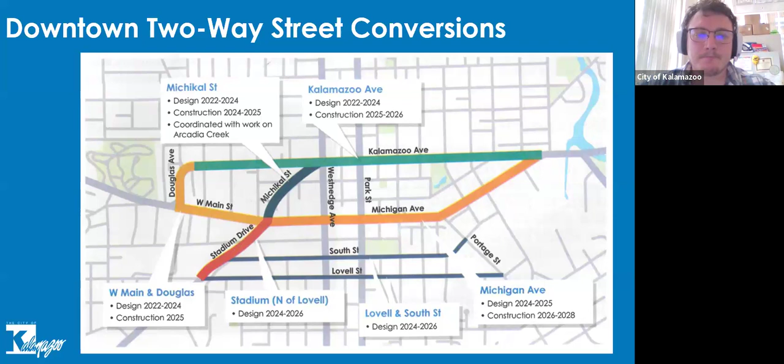Moving on to some more downtown work. There's a lot of work right now related to downtown utility upgrades, specifically tied to the future event center in downtown. All of these projects are being phased out to minimize impacts to navigating through downtown, although it's definitely tough right now because of big projects like Ransom Street and Michikal Street, to name a few.

Some of these projects are being managed by utility companies like Consumers Energy. The Michikal Street and Ransom Street projects are city projects. This gives you a ton of information on the type of work that's happening, and it's also available on the city's website. It has its own project page where you can download these maps if you'd like copies.

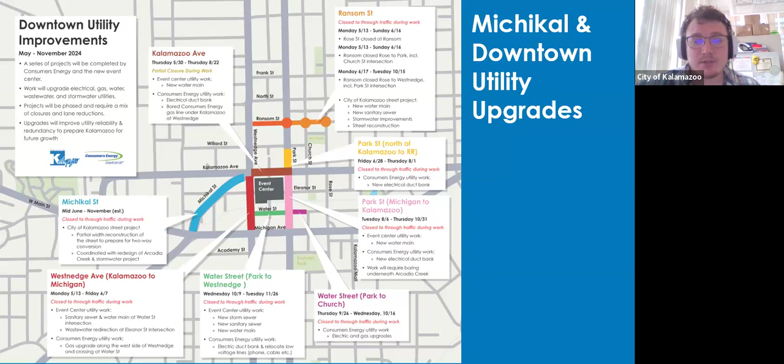All that work is leading to some detouring, right? So we have some pedestrian detouring, some motorist detouring, at least through the next couple days, maybe a little bit more. Specifically, that section of Westnedge Ave that needed to be closed for upgrades. So all that to say, businesses are still open. Follow detouring signs and watch for any signage changes. And of course, you can subscribe to those email lists for these projects to get updates on that information too.

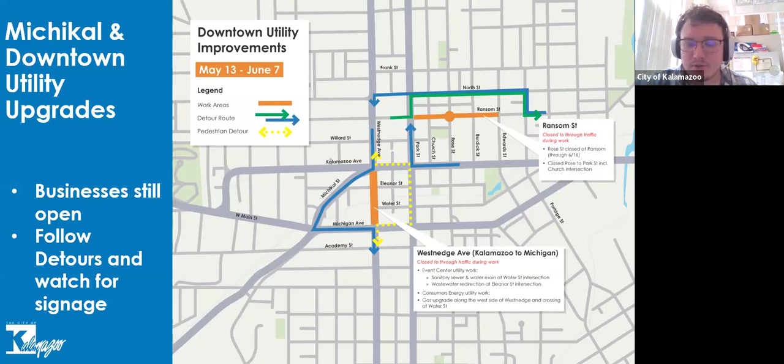One quick thing I wanted to touch on as it relates to the Michikal work is that during this period the street itself is going to be closed, and the Elm crossover is going to be closed and will remain closed even after Michikal Street opens back up. Elm crossover was placed within the network a long time ago when the one-way system was put in. It's not going to serve a major function with the new design of Michikal Street, and Michikal Street's being converted to two-way as well.

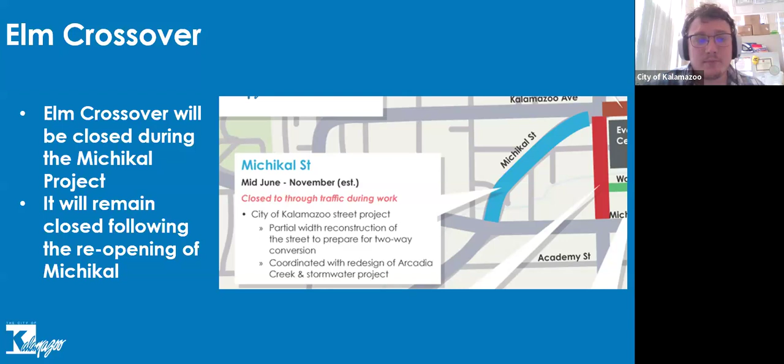A lot of this was also born out of when we did engagement around Kalamazoo Ave. We were in the Stuart neighborhood talking to residents, and there were a lot of folks interested in Elm crossover going away. So this is kind of a confluence of factors, but I wanted to call that out specifically.

With all this work going on the next couple of years, the other thing to draw attention to is that the Kalamazoo River Valley Trail is officially detoured for the next few years, because of all the impacts around Michikal Street, Westnedge Ave, Kalamazoo Park—not only the utility work, but also our major street projects. As of right now, this is the official detour map.

Pitcher Street and Michigan Ave are protected for folks on bikes, and then Elm Street is being used as a detour route on a low traffic volume street to continue on the trail. This could be updated based on how projects move forward, so just stay informed on this as well. We've been working a lot with the director of Kalamazoo County Parks to make sure signage is updated, so people can find their way around using the detour.

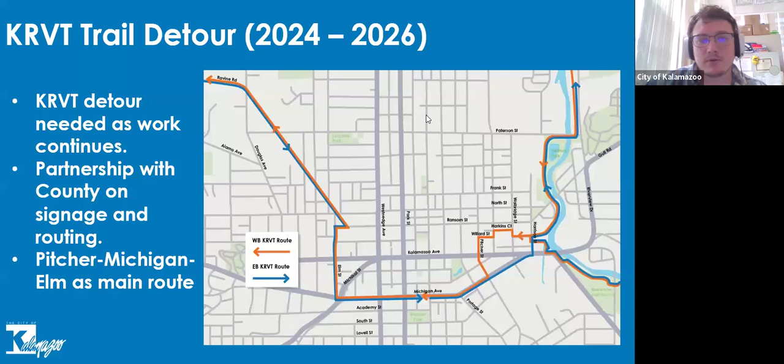No major updates at this point for Ransom Street as far as I'm aware—Tom or George, you're welcome to add any information here. This information is up on the city's website right now, showing where the detouring and local business access is in relation to the Ransom Street project. They've been moving westward since the project started up in early spring, getting through some big intersections—Burdick, Rose Street, and eventually up to Westnedge. Just a reminder, be aware that this work is still continuing, but there's business signage and wayfinding signage installed so you can find your way to local businesses on the north side.

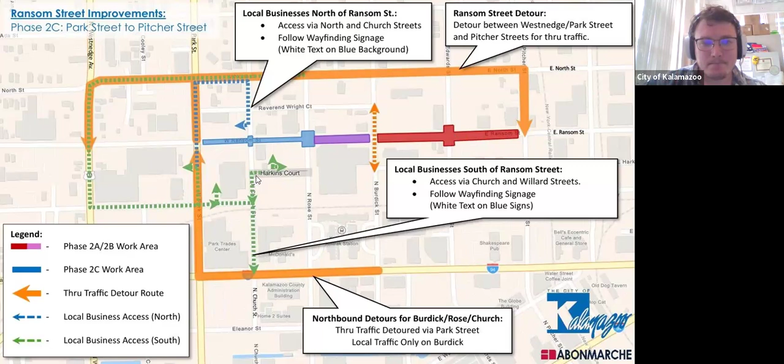And I'm going to pass the baton to George Waring to talk a little bit about Westnedge Ave.

Thanks, Dolan. So Westnedge Avenue work continues to keep going on. The most recent update is that the Crosstown and Westnedge intersection was closed today. Traffic should be aware that the main detour route for Westnedge traffic is now Lovell to Oakland to continue proceeding south. As you approach the Lovell intersection, take a right on Lovell and head over to Oakland to keep proceeding south, unless you have a local business in the area north of Crosstown—then follow the signage for local traffic. You can still access that area.

Work continues on the water main. They've just started doing some curb and gutter and storm work as they've been finishing up the utility work. As all the utilities are placed onto the project, they're going back behind and doing the restoration in the curb and gutter. With that, paving operations are still planned to take place at the end, once all the utility work's been completed.

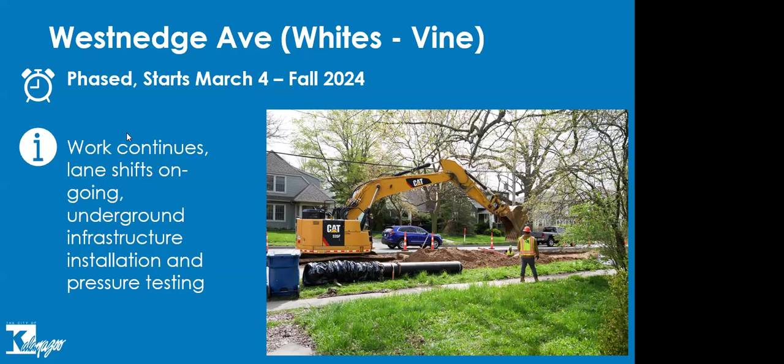White's Road is in much the same spot as Westnedge. They're continuing to lay water main, then they'll pressure test and fill that, and make side street connections to connect all the residents back to the new water main as they proceed along. So that work's still progressing.

This project also has some new signal pole work going on, putting in new foundations for several intersections and getting that prepped. There was a concern about the right turn only island at White's and Oakland and its placement. Our staff looked into that, and the placement was correct. However, the vehicle lanes, the layout of the lanes, and the pavement markings need adjustment. That's something we're working with the contractors on to implement as the project goes forward.

Inkster Street Bridge reconstruction has been going really smoothly. They're ahead of schedule. Work on the deck is completed, they finished pouring it, the pour went as planned and it's finishing up its proper cure time. They'll be working on the approaches to the bridge next. Right now they're looking to have most of the work done by the 4th of July holiday, which is tentatively when we're looking at opening Bronson Boulevard to traffic again, while they do some finishing touch work on the remaining bit. It's gone very well, the contractors performed well out there, so it's going to be a really neat asset for the city.

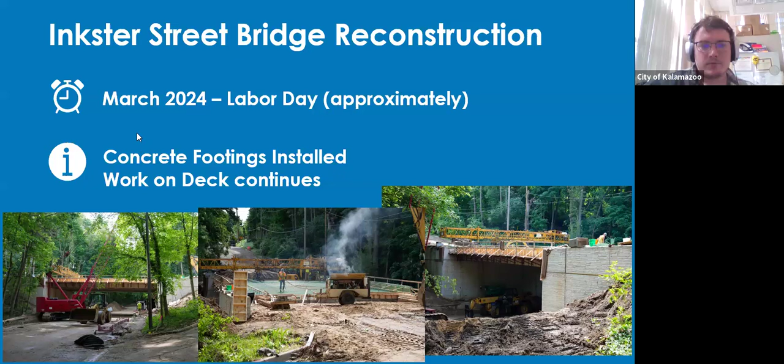Tom, you want to talk a little bit about an upcoming project?

Howard Street. We anticipate it's going to be starting shortly after the 4th of July, and that'll go for about a month, finishing up a good amount of time before returning students and new students come to Western for the fall semester. That's important given the proximity of Western. This is the section of Howard that runs underneath the bridge to the hockey stadium and underneath that pedestrian bridge also.

For the most part it's a pretty basic resurfacing project, but we've got a few extra items, and we're going to be adding a turnaround. That's going to be the most noticeable difference, so that vehicles trying to get over to the Knollwood neighborhood don't have to go up on West Michigan, but instead can get over to Rogowski and into that neighborhood by Redwood Ave a little more easily. That'll probably be the most noticeable difference coming with this project.

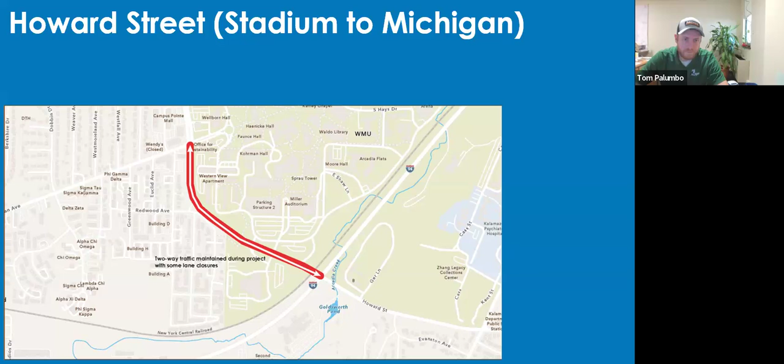Awesome. George, did you want to talk about Riverview Drive, the work that just was completed?

Riverview Drive, they completed the final paving of the surface and the majority of items on that project. There are still a few items left to complete, a little more restoration and cleanup that needs to be done over the next couple weeks. But that project went relatively smoothly and got done within the project window. There's been a lot of improvements: all of the sidewalk in bad shape got redone, we redid any ADA crossings that didn't meet standard, remarked with high emphasis signs and pavement markings the crossing at Hotop, and made safety improvements at the East Michigan and Riverview intersection.

Due to some high crash history, due to a dual left turn and a higher speed pork chop island cut through there as well, we made some of those changes recently. We're still monitoring the crash impacts and the traffic impacts on that, as well as speeds. We'll be watching that over the next several years to see how that corridor responds to some of the changes made.

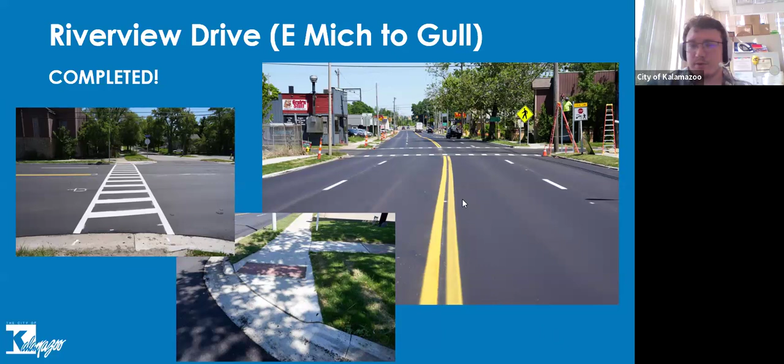Awesome. So those are some of those big local projects. I wanted to turn some attention to some federally funded efforts that are going to have some big impacts alongside some of those local projects. Tom, I was hoping you could touch base a little bit on the Protect grant.

You might have heard that the city was awarded $38 million in federal grants for, I want to say, a $45 million project. So we've got some money coming from other sources as well to fund this.

What this Protect grant project is going to do is eliminate floodplain around Arcadia Creek. And when I say eliminate floodplain, that doesn't mean we're filling it in or raising up the ground. That's not a sustainable way to do that, but rather we're going to increase the capacity of the creek. Part of this creek is going to be relocated.

Much of it is in that orange area that you see there. A significant percentage of that is running underground in pipes. Those pipes are undersized, and just having a creek run underground isn't really a good way to have a creek running through our city or anywhere.

So we're going to do what we call daylighting, which is exactly what it sounds like - bringing that creek above ground in as many places as we can. Obviously it's still going to need to go under roads, and there are some tight spaces where it's going to be hard to daylight, and it might not be feasible. But anywhere that we can, we're going to daylight it, and improve the creek to resemble a natural creek, bring it back to what nature intended.

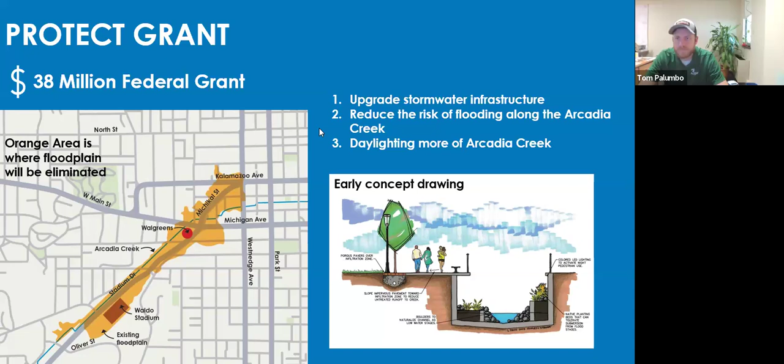Thanks, Tom. I'll just shout out that this was one of the, I think it was the largest federal grant distribution for a project for this work. So this is pretty big deal for the city, especially with all of the localized flooding issues that we've had in the pretty recent past.

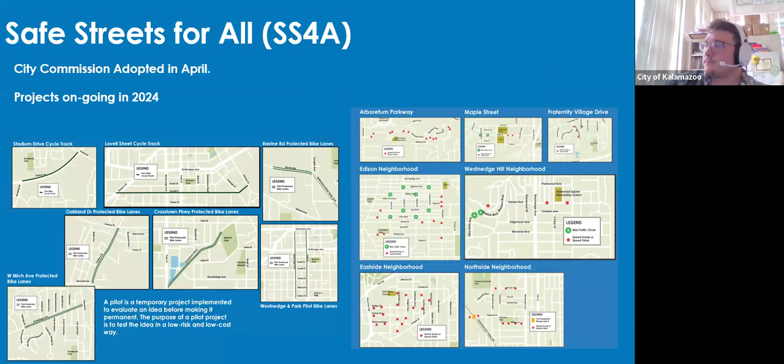George, did you want to talk a little bit about Safe Streets for All? Sure. So Safe Streets for All - this is part of a larger project that is right about $1 million in total.

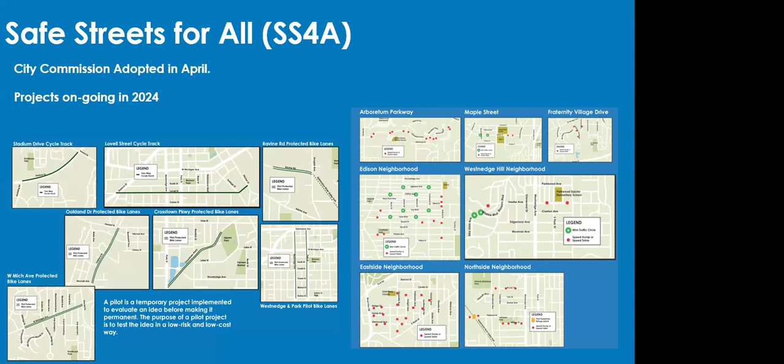Much of that is federal funds, over three-quarters of it, with some other grant match from local grants used towards that as well. What this project is piloting is certain proven safety traffic calming measures - things like speed humps, speed tables, mini traffic circles, temporary bump outs, that are proven measures for traffic calming. So part of the project is doing that.

The second part is a safety action plan, which is really the bulk of the effort - to develop a safety action plan for the city. That way we know a couple of things from the data: crash analysis, speeds, intersection identification, and many other facets. We can understand where our most problematic safety concerns are, and then use these different measures to help improve safety initially in the short term through pilot projects, and then plan those into capital projects for long-term safety improvements.

So that safety action plan will kind of balance those two things - doing some quick-win initial projects to improve safety, and also identifying those long-term items that need to get completed as a part of the capital process. So we're working both of those projects right now.

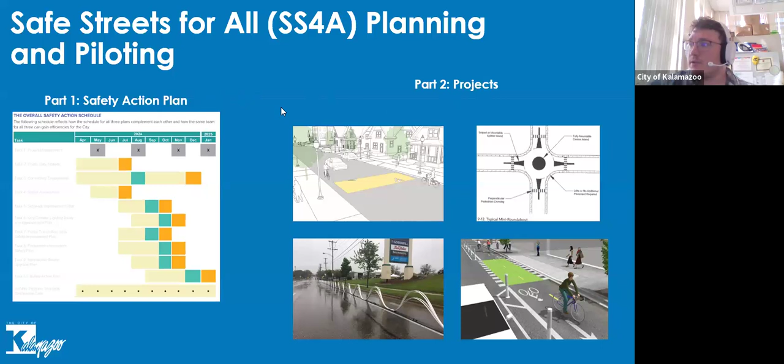I just wanted to call out here before we conclude the informational portion of the webinar, we did host a series of open houses around these projects earlier this year, in January, February, and March, to have a touch point with folks on those projects. We are going to be hosting a community update session on June 27th from 5:30 to 6:30 at the Girl Scouts Regional Program and Training Center on Maple Street, to talk about Bronson Boulevard again, and the future of Bronson Boulevard. So would love for you to watch for more information on that, and feel free to share that information.

That's the information we have today. If there's any questions, I haven't seen any come through in the question and answer chat. I did want to ask a question related to Riverview. George, you mentioned the slip lane as you're approaching the Riverview and East Michigan intersection. Could you explain some of the work that was done in that area, and why it was updated?